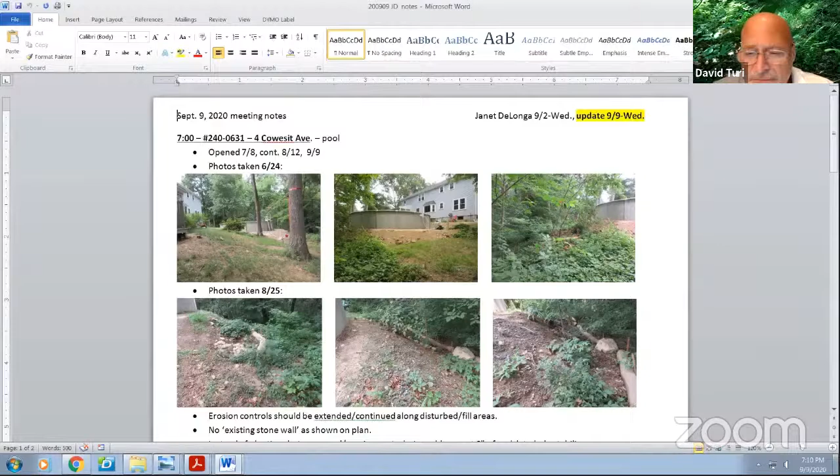What do you think of Janet's suggestion? Sure, that's totally fine. We were going to put some loose stone, and mulch is fine, we can do that, and some pachysandra we were thinking. I guess it's photo 2 up at the very top, you see how that's just soil there, something's already growing.

I don't know what that plant is called, but where the silt sock is for erosion control, it spreads. That was already there in the yard, so we can add more of that too, but I'm happy with what Janet suggested. Okay, is that something you can do in the near time frame?

So in the next week or two? Sure, yeah. Okay, if you'd let us know when you've completed it, Janet can take a final look at it.

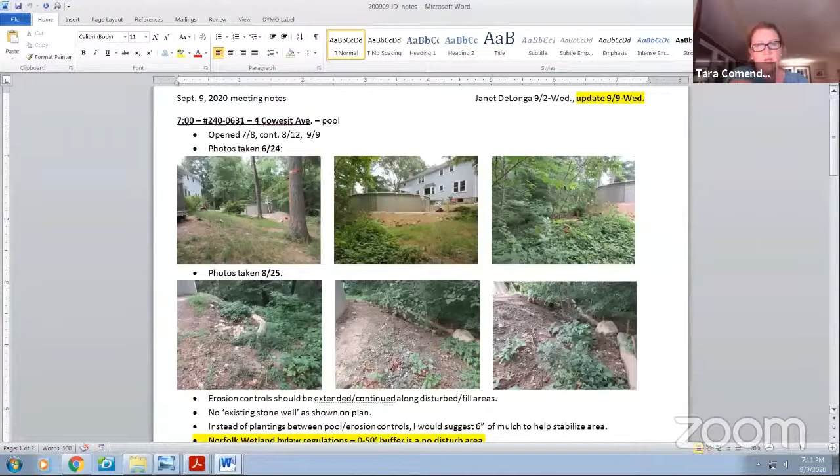So she just wants mulch around the whole thing, Janet, or where exactly do you want it? That whole area that's been disturbed around the pool, above the erosion control, just so that soil's not washing down to the wetland. Okay, no stones, you'd rather have mulch? Because last meeting we talked about stones where you suggested. We were going to do some loose stone there to keep it, and there's a stone wall.

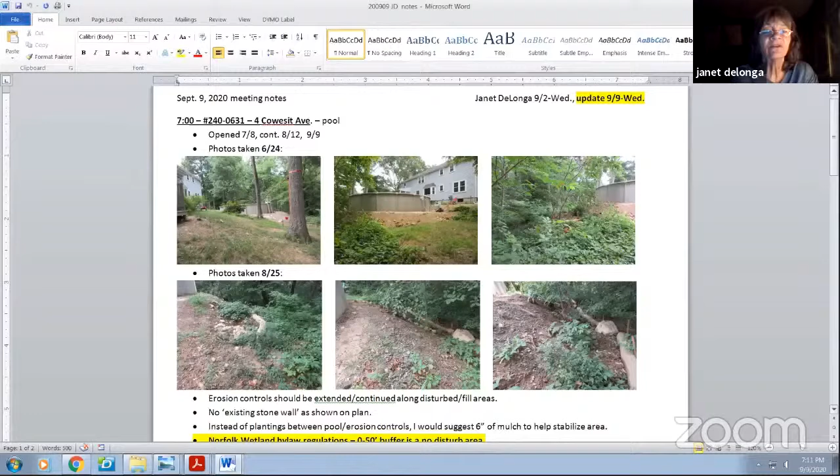I don't really see a stone wall, I see rocks from when the fill was spread, but I'm not seeing a stone wall out there. Okay, yeah, it's buried by the soil, but okay, I can do mulch, and 6 inches. Yeah.

Especially if we're getting heavy rains tomorrow, there'll probably be some washout too. But if you would do that within the next 2 weeks and then let Janet know, she'll take another final inspection. Sure.

So what I'd like to do is just continue, since the pool is already in, we can continue it. Is there any conversation, questions, comments from the other commissioners?

Okay. David, if I could just bring up one point, because...

As far as the state regulations, you've got your buffer zone, people can actually go up to the 0. Under the local rules, we have that 0 to 50 foot do not disturb area. They have disturbed that 0 to 50 foot with the work they've done. This is just for the commission members to consider: how do they feel about that? Do they want mitigation for the area that's been disturbed in that 0 to 50 foot buffer zone? That's for members to decide.

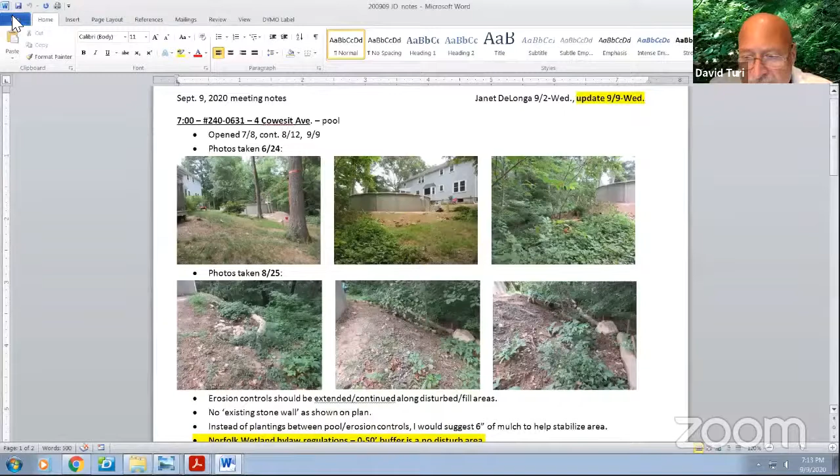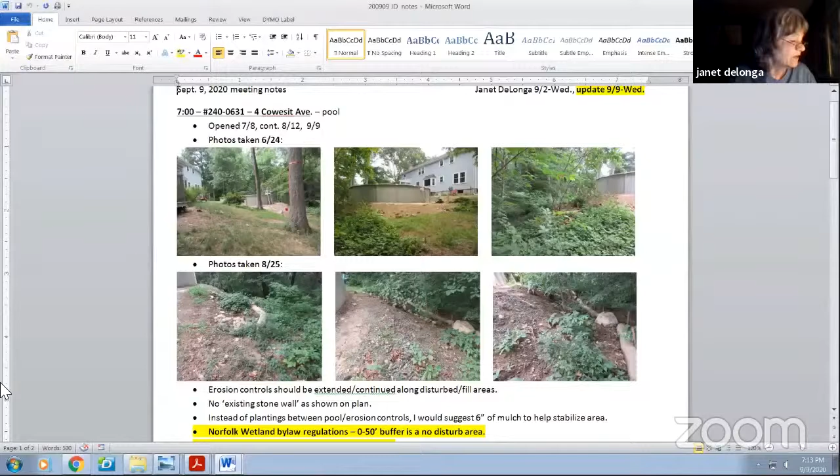On these pictures, where is that 50-foot mark? Well, it's hard to say because it goes down slope and you're measuring horizontally. If you look at the plan, it shows the erosion control 35 feet from that wetland, so that's 15 feet into that 0 to 50 foot do not disturb area.

Janet, I think it said 47.6, so we're only 2 feet 4 inches, with the plan that we got. If you measure to where the erosion control is, that's where you're hitting the disturbance, that's where the fill is. So it's from the wetland down to where that erosion control is, and that's about 35 feet.

But the pool is, I guess I'm just trying to clarify. The pool itself is only 2 feet 4, and we have the erosion control there. Right, and then you've got the fill in between, so that goes down to 35 feet. Well, I think it's on an arc, so I agree with you, Janet. It's hard to measure, that's that particular arc where it hits, because the pool is round.

I wouldn't say 30 feet, that's quite a big number. I'm looking at the same plan, just looking right here.

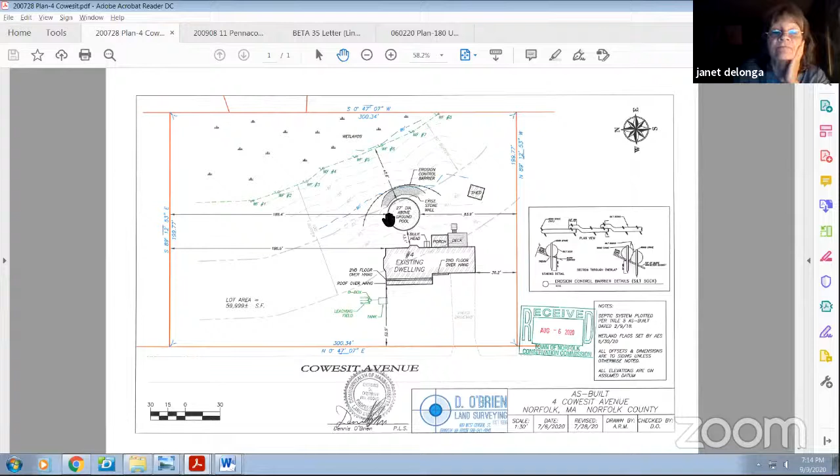So, the members don't have to have a decision now. If they were thinking of doing an order of conditions, that could be something that's in the order of conditions for them to address. That would be the area of the 47.6 that's on the plan right now.

Yeah, but you say it's down to 35. Right, because that measurement's from the wetland line up to the pool, when you have that fill area there, and that area has been disturbed, where the fill is around the pool, but that's the only area that's been disturbed.

Right, okay. So I have a question, it's Fred. Looking at the plan where the line goes 47.6 from the pool down to the wetlands, what is in that area? Is that just all brush below the erosion control barrier? Yeah, how much is the slope?

It's pretty steep. I told Janet, we had a conversation, I don't walk back there. It levels off at the back of the yard, there's a level area, then it levels down to where, that's why we had to add stuff to level the pool. Then it levels down a little bit, but there are existing stone walls in the woods there. It's all brush, there's some trees. If you look at the pictures, where the silt sock is, you'll see trees growing pretty close by. It's all grown in, we don't really use that or walk back there.

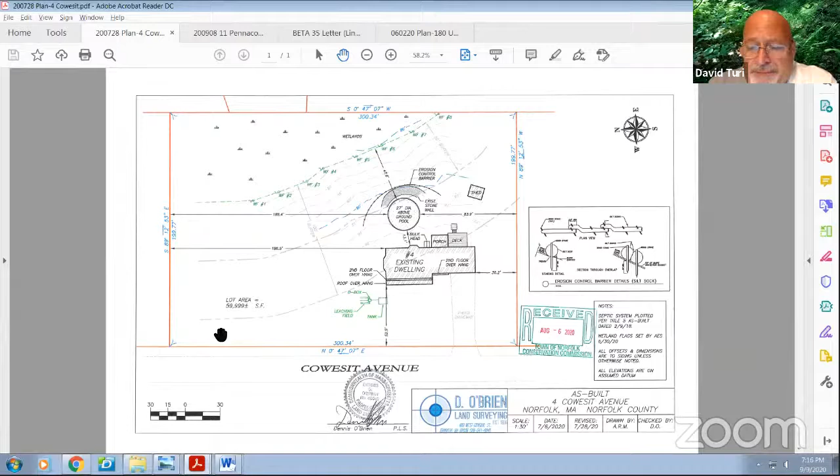Do you think some plantings would be appropriate to help prevent erosion? I'm happy to do that. Yeah, we planned on doing that anyway. Anything green you can get more green back there is fine. But then usually people run to a big box store getting plants, and most of those are not native or they're invasive.

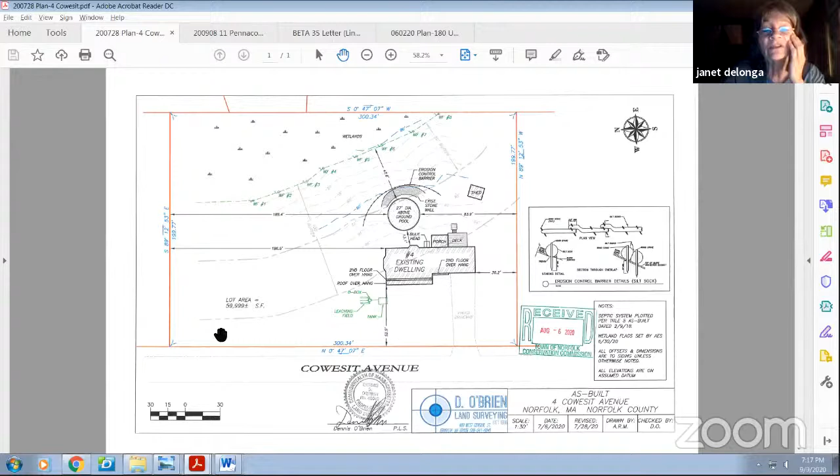My thought was, especially with children coming out of a pool, originally you were talking about putting in some sort of evergreens or something, and I wouldn't want them to run through there barefoot. So I thought mulch is nice for holding that soil, and you're not getting attacked by plants or anything growing up through it. But if I had my choice, Janet, I would do the erosion control plantings rather than the mulch. The above ground pool just has a ladder, so they're only going in and out in one location.

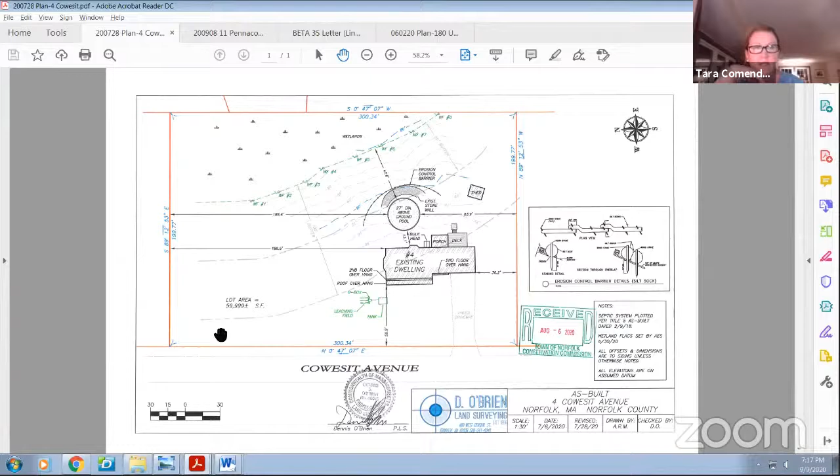You can't kind of jump out, and I think the pictures show that. You can't really walk there, you can walk around the pool to clean it, but that's the only thing we'd be doing. We wouldn't even be walking back there. It kind of looked nice with the trees and the shrubs, all that greenery looked nice.

But our concern right now is to stop the erosion. You can see that soil, every time it's raining, is heading down. Plantings, you're going to disturb the soil to put the plants in. They have to be watered. In the meantime, that soil can still be going downhill, and it takes a while for those plants to spread out. Our concern right now is trying to stop that soil from eroding down into the wetland area.

Oh, I understand that. Is there, if I may ask, any reason why we're not seeding this and trying to get grass to grow on it, and just let it go? We haven't been able to do anything since, each meeting we've had, we've asked if we could add things, and we were told no.

So each meeting, until we get an order of conditions, we can't do anything back there. So we're kind of at a standstill, because as you can see, on the other side there's no picture of the other side of the pool, but there's green growing everywhere because it's been so long. It's been about 5 months.

So I just would feel better if there was some kind of root system in there rather than just mulch, because mulch is going to wash away. And I have a pool, you're going to be walking around there cleaning it, and that's going to wear it also.

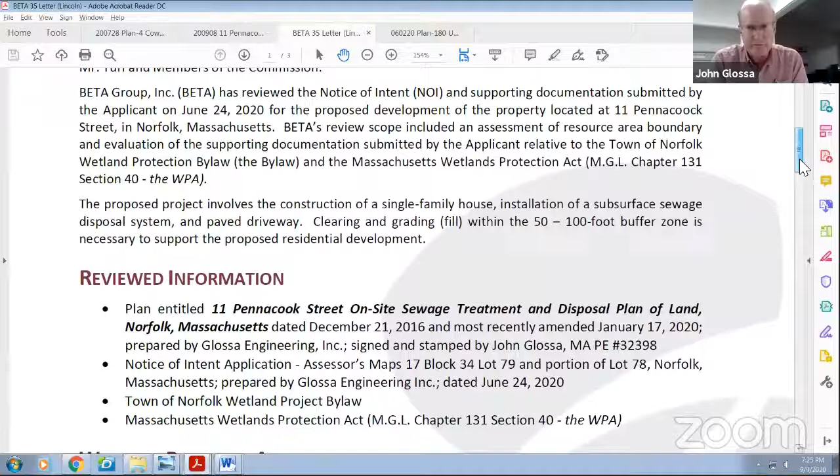No, other than, as I said, I went out with Julia and with Janet, tried not to influence their decisions at all, but just wanted to make sure that they knew where the property was and where they could find the wetland flags, and then let them sort of do their thing. And I've read the peer report. I don't see any issues on our side, on our behalf, but I'll let Julia explain it to you and Janet. And if you want me to speak, or if you have any questions, I'd be happy to answer anything, Mr. Chairman. Thank you.

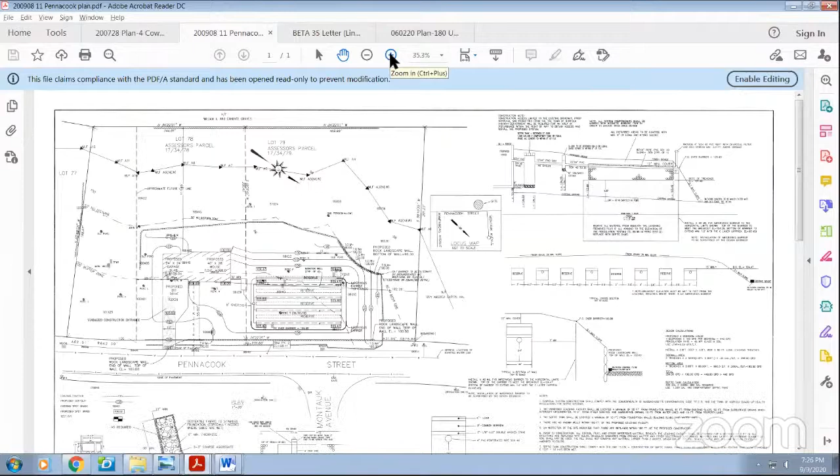Okay, Julia? Okay, hi, yes, so we met John out at the site. Thank you, John, he gave us a little tour, and I agreed with their wetland line. So that was good. The only items I have to comment on really is the notice of intent, which was pretty basic and straightforward, very good. But on the plans there are many spot grades as opposed to contour lines, so it makes it a little difficult to see how the proposed topography or proposed elevation lines are going to meet up with the existing contour lines.

You can see in the western corner of the, okay, right here, so we have spot grades. It's difficult to see how these contours, the proposed, meet up with the existing.

And the next item was, just where will they plan to put staging or dewatering areas? The groundwater is pretty shallow throughout the site, and so I really believe they're going to encounter groundwater when they start excavating. So just dewatering, it wasn't mentioned in the NOI, and that might be a concern.

And then the next item is a question about the narrative doesn't actually coincide with the erosion controls that are listed on the plan. And this is just minor - the narrative mentions an orange construction fencing as opposed to, I think, maybe a silt fencing, if that's what was meant, just to clarify that.

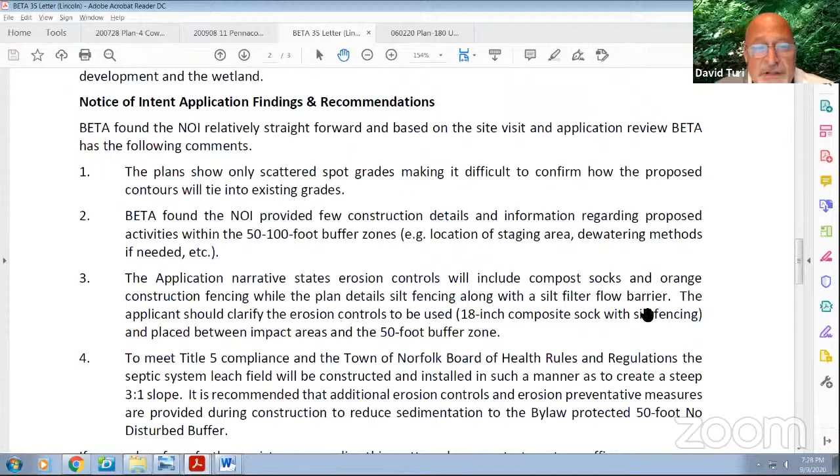Okay, Janet, do you have any comments? We got a new plan from John, John Glossa, so maybe if he goes over that. Where is that, is that the one on the screen? Yes. That's so tiny, I can't see that. Can you pull that up? Revision date of 9/8, way in the bottom right-hand corner. Can you confirm that, Amy?

So, Mr. Chairman, I can confirm it, because the only change is that on our plan prior to this, right up above where it says wetland flag A4, there was a note that said it hadn't been confirmed that these were isolated or bordering vegetated wetland, because we didn't really know who the people to the right were - that's sort of downhill as you're looking at the plan. But since we did the plan originally, we walked through there and found that this wetland does connect to wetlands that are on the abutting property.

So it'd be to the north on the abutting lots to the north, and then eventually there's a culvert under Massachusetts Avenue. So this is all connected, and so it is bordering. We took that note off, and that's really the change.

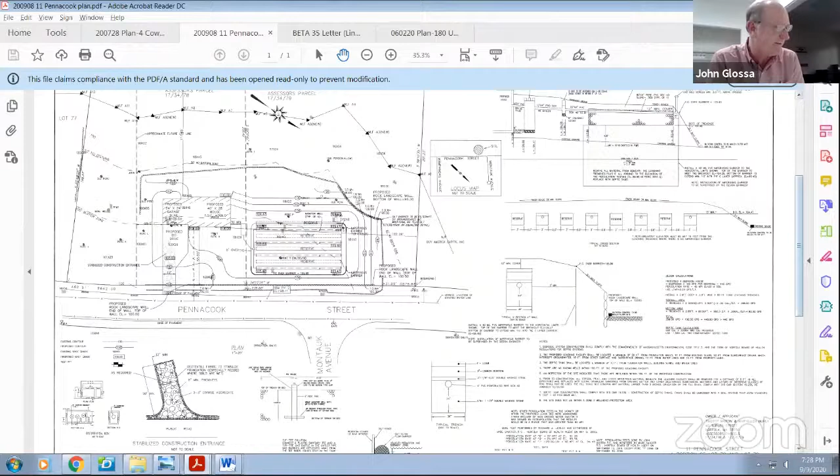The reason there aren't a lot of contour lines is because if you went out there, you'd see that most of this land is flat. So we generally just do 2-foot contours, and that's what we show here. There's not a lot of contour lines, but if you want us to make it 1-foot contours, it's just a click on the computer. We could do that if you'd like.

We could add a staging area if you'd like. As far as dewatering, I don't know if there's a note on here, but maybe there should be. We normally notify the contractor to, if he does encounter water, the soils here generally, as you can see from the percolation rates, don't perk all that quickly. So even if they do encounter water, they're not going to encounter a lot. It's not like trying to dewater gravel or sand, there's not going to be a lot of water. But generally we put a note and tell the contractor that if he does encounter water, he needs to call us and the Conservation Commission agent.

We come up with a plan depending on where they find the water and how much there is. I would suggest the only time they may see water, and I know it's a shallow water table, is when they build the leach bed, not when they put in the house. Because if you look at the house foundation, it's actually above the ground. I know they're going to go down some feet to make that work and meet the building code, but it's highly unlikely they're going to see water. And in that upper layer, you can see we called it a silt loam, so it doesn't have a lot of water in the soil.

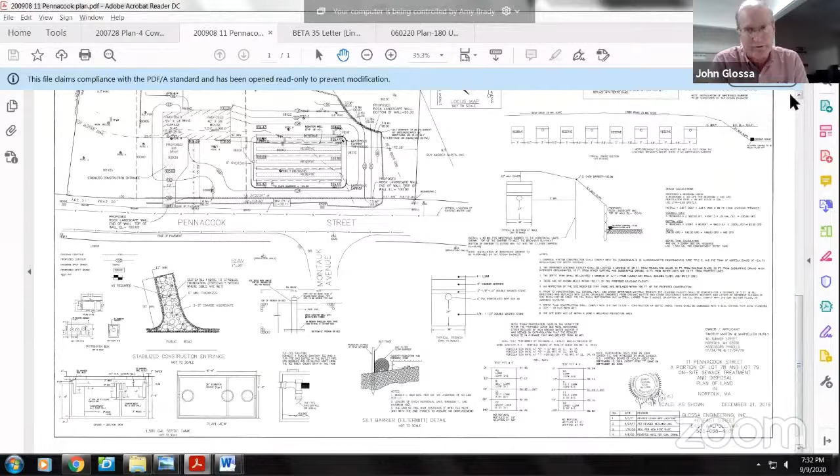So we're using, I know what Julia's saying, but we're using your typical, or what you like to see, which is that Groundscapes from Wrentham filter mitt, which weighs 850 pounds per cubic yard. It's average 50 pounds per linear foot. It's a lot bigger than even a 12-inch compost sock. Once it's brought in on a truck, the burlap, the mulch is blown into it at the site, and once that's in, it sort of settles down and almost has a triangular shape to it. And it doesn't move.

If you would like us to, on the 3-to-1 slope, add something once it's loamed, I'm sure they're going to hydroseed it, but you can do that with a condition, or I can add a note to the plan. My opinion is that I don't really think it needs all that much attention. I think that the Groundscapes compost sock, that filter mitt, does a great job of keeping anything from moving across it or over it.

As far as the silt barrier itself, that's pretty much your typical silt barrier. I think for Norfolk, if you want to make the silt fence orange, or add an orange construction fence, we can do that. We don't mind having the silt fence orange so the contractor can easily see where he's supposed to stop work, and doesn't migrate out of the limit of work. But we do show it's almost looped around the entire site. The only gap is a little bit on the south side, between where the driveway is and where the road is, and the reason we don't put it there is because that's uphill, so we don't really expect any erosion or loose soil to migrate in that direction.

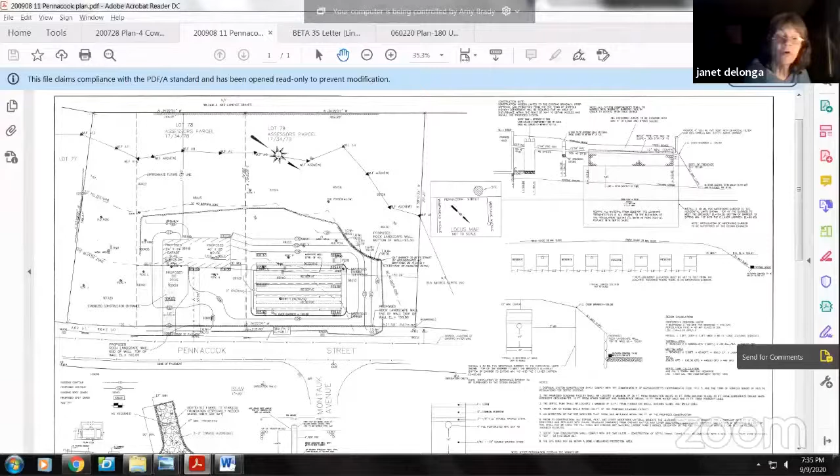So putting up the orange fence along with compost sock at the bottom to prevent erosion, is that what you would concur with? Right now we're saying silt fence and the filter mitt. The black silt fence, but they do sell orange silt fence, so we can just say it's orange, and it's effective as highlighting where the limit of work is. In fact, we do that more often than not, so I'm surprised it's not on our plan that way, but we normally call for orange silt fence.

Just to clarify, it was on the plan, it just wasn't in the narrative of the notice of intent, so there's a bit of a discrepancy there. So it was just a clarification. Yeah, I do the notices of intent, so you can yell at me for that one.

Okay, if you'd make those changes, and since we just got the plan, we can do some further review on it, and we'll continue it until the October 14th meeting, and we should be able to conclude it at that time with the changes we've discussed here.

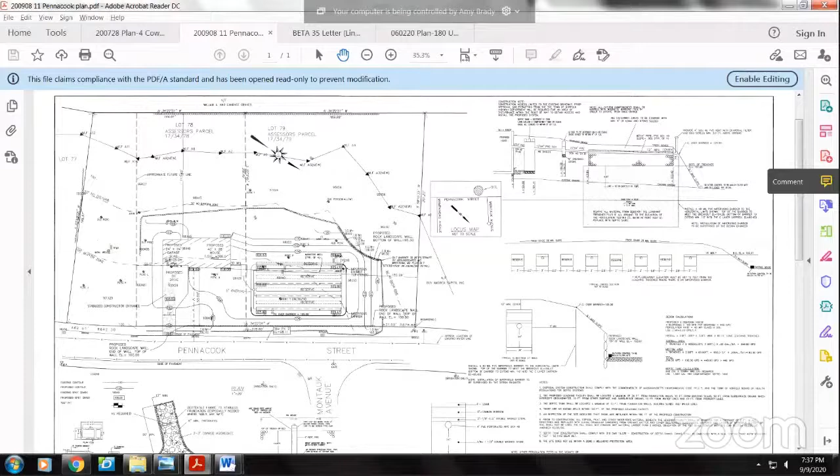Would you like to see the 1 foot contours? Do you think that would help? I believe so. Yes, if it's available. It's simple. Great, please, John. Okay, and then I'll add the language.

Is that fair? Is that acceptable to the board? Like I said, we often put language on there that says when groundwater is encountered, prior to any dewatering, the contractor shall stop, call the engineer, call the Conservation Commission agent, and formulate a

way in which to handle the groundwater. What I find is no matter what we put on the plan, they do something else, or there's some reason why they can't do what we put on the plan. So I found that the best thing to do is just tell them they need to stop, and the three of us figure it out.

Okay, put that on the plan. Yeah, and it gives them at least notice that they have to notify people. And you can believe me, Mr. Chairman, I'm not trying to take anything away from you, but believe me, if they do have to dewater, it is not going to be a lot of water.

It just isn't a lot of water in this soil. As long as it's not a rainy season. Right, if there's surface water running into a hole, that's a little different. Yeah, John, I don't want to disagree with you, but I'm very familiar with this, with Montauk and Pennacook in that area.

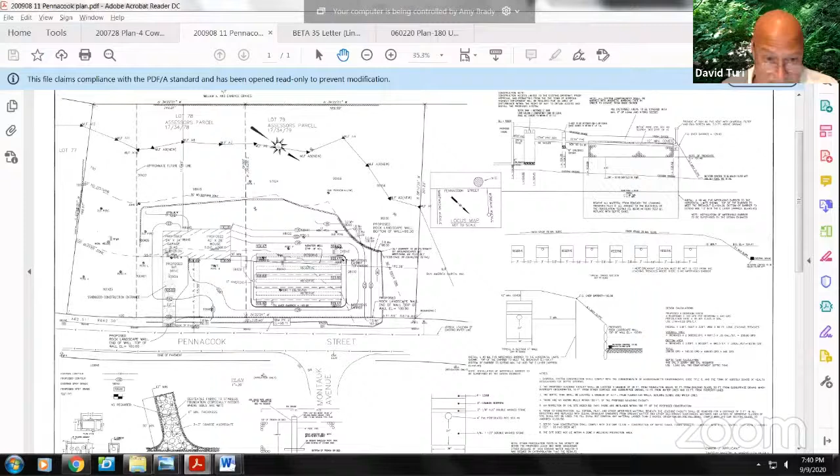I'll make a motion to continue 11 Pennacook Street, NOI 240-633 until October 14th. And what time do we want? 7:05 PM.

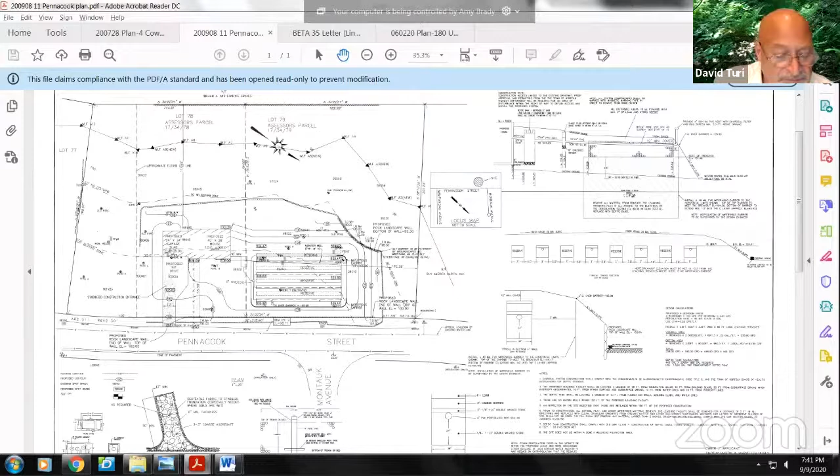Alan Finney, I will second that motion. Any further discussion? Okay, let's do the roll call.

Alex, 11 Pennacook Street, notice of intent. Alan, aye. Jim, aye. Alex, aye. Fred, aye. And Val, aye. And I say aye.

So it passes. We'll see you as soon as you make those corrections, John. Please get them to Janet, a new copy of the plan, so then she can review it before the next meeting. And we'll see you on the 14th.

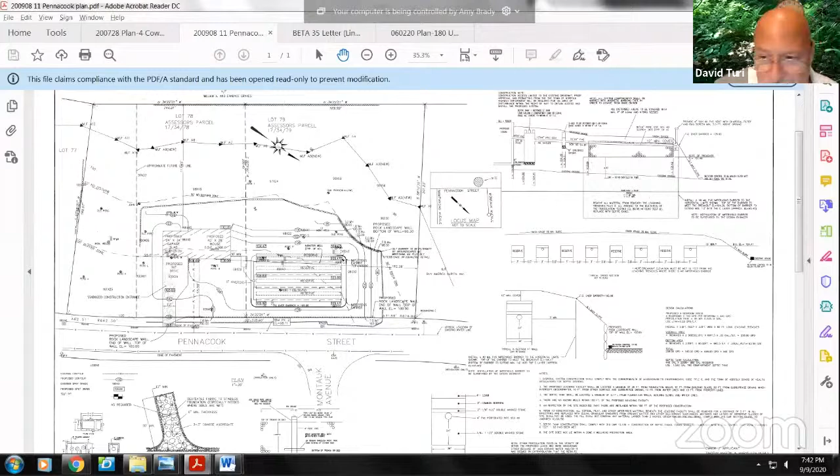No, we do not. Okay. Who's here to talk about that? I'm Charles Perret, owner of Environmental Contracting Company.

Can you see us? Yes. No, a little bit. Right there, the camera. Okay. Is that better? Mr. DeFilipo, what is your name again? Your first name? My name is Mark. Okay.

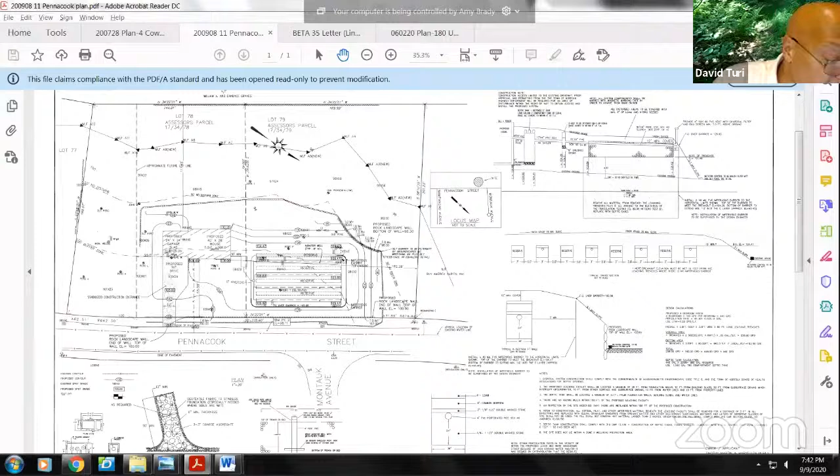Since we really can't do anything about it, we'll let you talk for a few minutes and bring us up to date on what's going on. Okay.

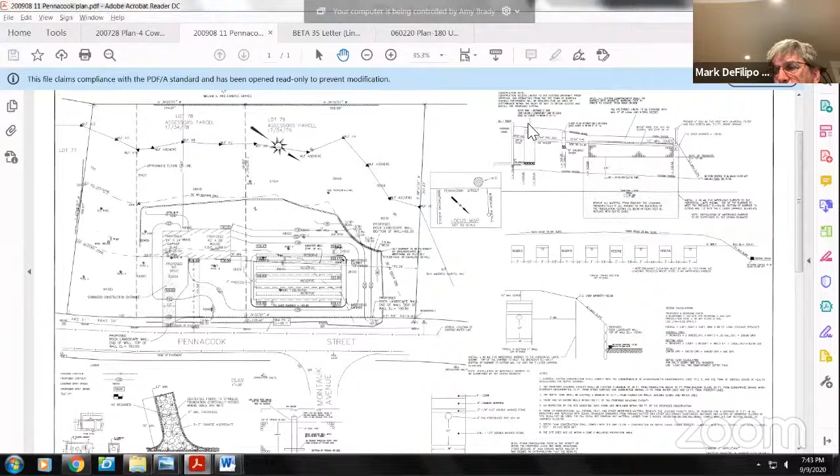Hi, I'm Charles Perret from Environmental Contracting Company. Mr. DeFilipo is proposing to put in a swimming pool in his backyard. He's 130 feet away from the wetlands area. It's a level backyard. I sent over the plans a while ago, and basically he's just looking to move forward on it, with erosion control and things like that. Okay.

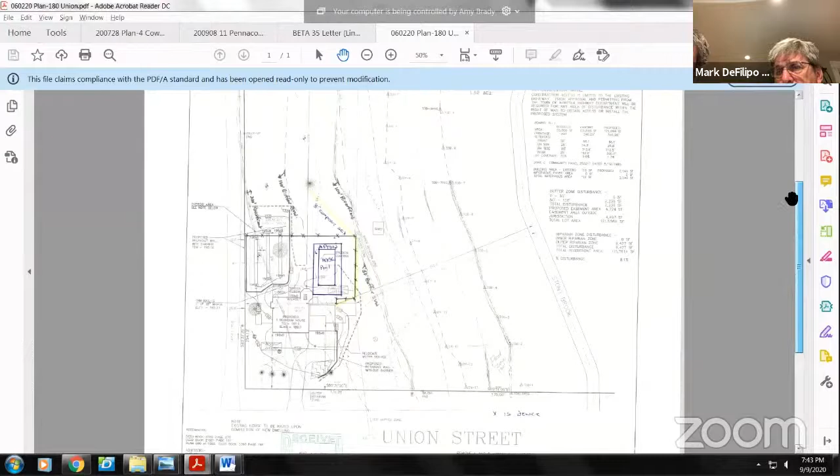Yeah, we'd like to move ahead on it, but without a DEP number, we cannot. I understand that. We've been having problems with DEP releasing numbers on projects. They say it's the Corona thing that's going on. We sent all the information out. We couldn't even send it registered because there's nobody there to accept it in a registered area. So it was all sent out, it's just a matter of having them get up and do it. Yeah, but we understand your position.

But we'd like to ask, is there any questions that the Conservation Commission had for us regarding the project? Okay, Janet? Would you like to go first? No, somebody else can go first. I'm shuffling papers, sorry. Okay. Any other commissioners? Do you have any questions, comments?

If I could just ask where the location of this property is in regards to Union Street and King Street, where is it, right in that corner? The second one up from King Street, not on the corner, the one further up going towards north on the right. The red one? Yes, across from the field. Okay, yep.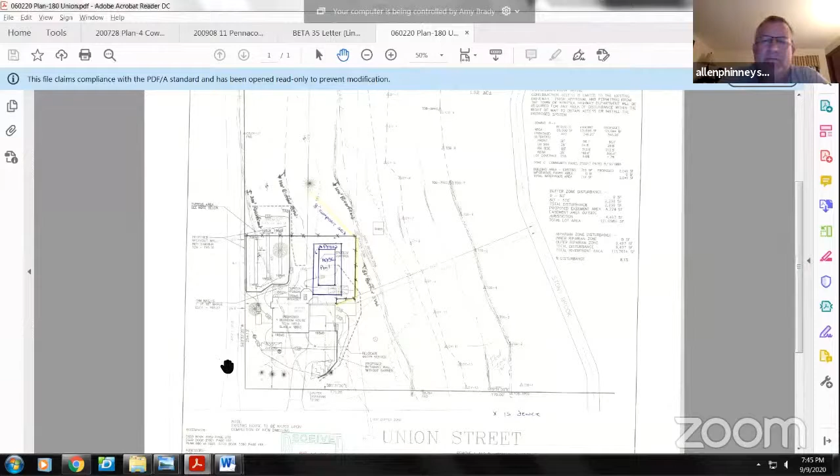So we're talking about an in-ground pool? Yes, 18 by 36. This is where the access road is to the well site out back, correct? Yes, that would be on the left side of the property. Okay, Amy, can you blow this up? The picture, the plan?

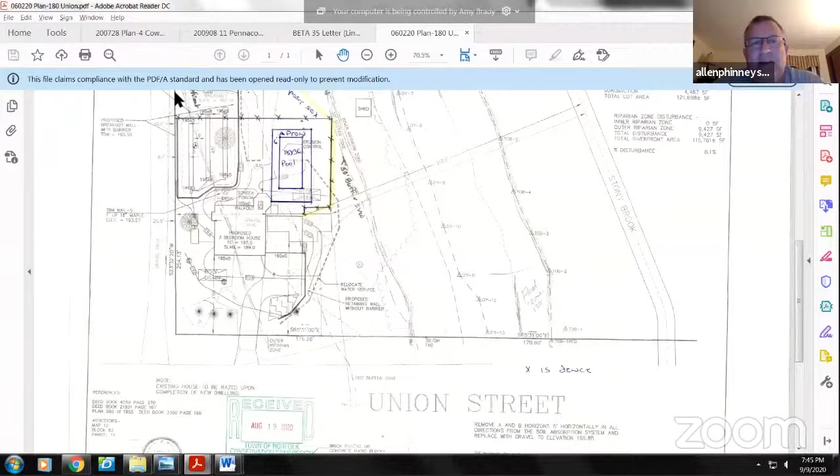Where's the road, Alan? Right to the left, all the way to the left. Dave, you can see that access road goes to the Wrentham's, one of their well sites, but it's quite a ways back. Okay, the property behind there is pretty flat. Okay.

David, when there's a chance, I got a question for him. Yes. Just, sorry, flipping through the notice of intent. For buffer zone resource area impacts, you've got it marked for riverfront area, 200 foot, all other projects, but I don't see the numbers put in here for the disturbance for this project.

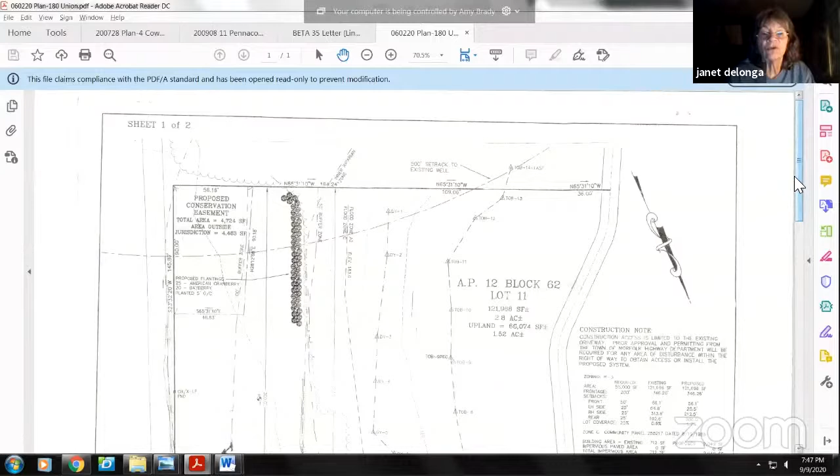And if I might, way back, I think that was with the pictures, but they originally had a small house there and built a new house and moved into the new one. Because of the perennial stream there, they had riverfront area, so they're only allowed a certain percentage of riverfront disturbance. When Mark started last year, according to Mr. DiFilippo, he said if his wife wants a pool and they can't put a pool on the property, then they were going to have to move. So I did up a letter with what they had used before, what was remaining for riverfront area they hadn't disturbed yet. And if nothing else has changed on the site, that was the window they had left for disturbance of the riverfront area.

So even when I was out there the other day with Amy DiFilippo to get the picture out back, it's still the same way it was, the same lawn. They haven't put in tennis courts or anything else, so I feel comfortable with all that. The stream hasn't moved or anything, so they're just using some of that riverfront area that's left. Just keep that in mind, because you're not going to have enough numbers left to put in another pool or anything. Just putting that out there too.

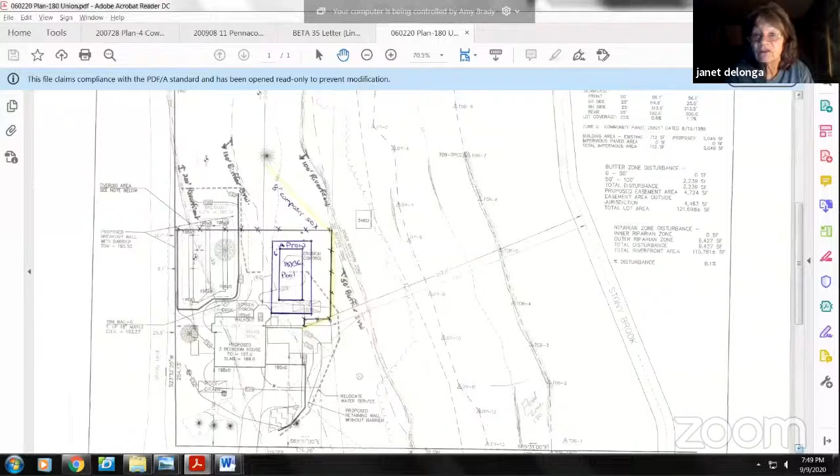But the only thing, maybe try to call DEP, the central office, to see if somebody can find that. Did they get that, or can you fax a copy over? Because I don't want that part of it. I know it's been tough with all the adjustments we've been going through for this situation, but just to see if somebody has it, if they can find it or not find it, let you know. Can you fax it to someone just so they get that, so we can keep processing this along for you? Great, thank you. Okay, yep.

Any other questions, comments from the board or people in attendance? Okay, hearing none, I'll entertain a motion for 180 Union Street to continue until October 14th at 7:15 p.m.

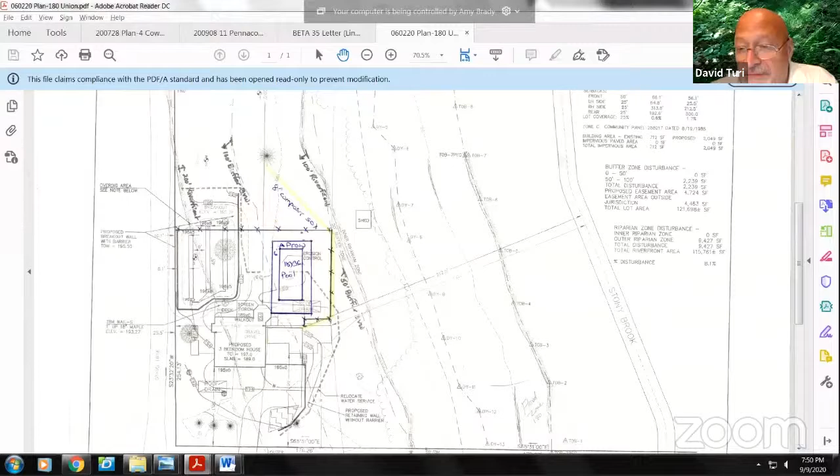Is Alex that - Wysek, so moved. Okay, second. Charlie Frere, second. Okay, any other questions, comments? Okay, we'll take a roll call. Alex, aye. Alan, aye. Val, aye. Jim, aye. Fred, aye. Alexandra, aye. And I vote aye. So we'll see you on the 14th.

And yeah, work with Janet and we'll try to get the DEP number so we can get this project moving for you. Sure. Was everything else in order? I believe so. Great. Yeah, fantastic. We'll wait for that. No, we're not going to change anything.

We'll wait for that DEP number. And what my company does is we do the erosion control also, so we'll be handling the 8-inch compost sock. It's a 3-to-1 slope ratio there, so it's very, very comfortable. Okay, thank you. Thank you, sir. Thank you, take care.

Okay, is there any other new business or action items? That's it. David, was the other Eagle - because I talked with him, let him know that he didn't need a permit from conservation for working near that vernal pool. Does he need a sign off on that? For behind the school you're talking about? Yeah, he needs a sign off on that. And I told him that I'll coordinate with him to get that signed off.

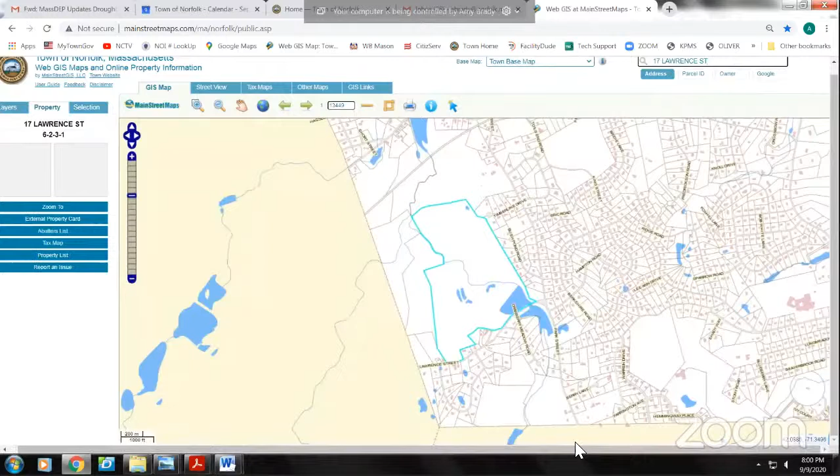Can you see that? The tan line on the left shows Franklin. Zoom in where the word Lawrence is - one of those properties is currently owned. The assessor's information says owned by the selectmen, code 9300. Amy, can you zoom in a little bit? The one above the CE, is that a house there? So that might not be that one.

I'm not sure, but somewhere there are two houses that are to be demolished. I don't know if that's one of them. I think it's right to the left of the development, or one of them. But the property to the left of it, I think the page ends in 11 there, right against the tan area.

That's currently owned by Norfolk. No, okay. Moving up, not owned by Norfolk. And if you keep going up, what's currently in the upper left? The 12? 12 is owned by Norfolk. And if you keep going up, there's another one.